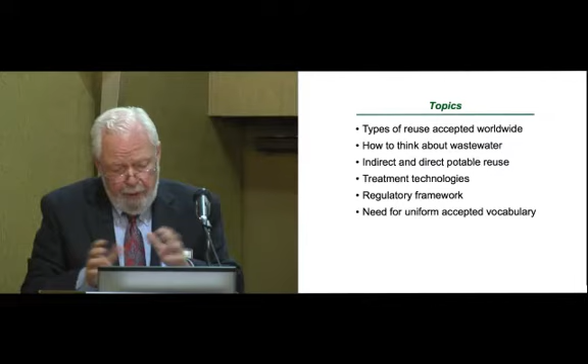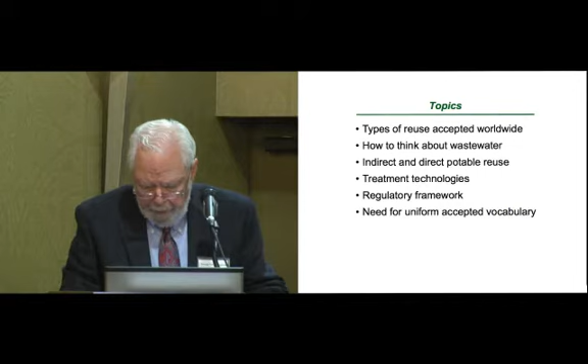So what I'd like to do today is talk a little about the types of reuse that are accepted worldwide. Then we need to take another look at how we think about wastewater, especially in light of the design of wastewater treatment plants. Indirect and direct potable reuse, some treatment technologies, a little bit on the regulatory framework, and the need for a uniform vocabulary.

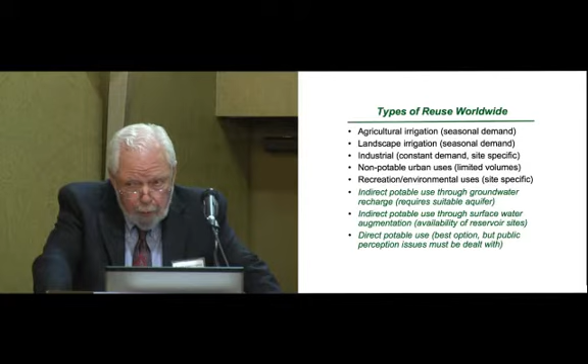So if we take a look at the types of uses worldwide, in order: agricultural, landscape, industrial, non-potable, recreational. Then we get indirect potable reuse through groundwater recharge. Then we also have indirect potable reuse through surface water augmentation. And then finally, really direct potable reuse. So let's talk a little about direct and indirect potable reuse. What are the driving forces for these two technologies?

Well, you heard it before, but certainly the value of water is going to increase dramatically. In the Central Valley in California, it's gone up by a factor of 3 in the last 5 years, and I anticipate it will go up another factor of 3. De facto indirect potable reuse is a reality. Infrastructure limitations. The technology is really not much of an issue, but population and global warming are other issues that will drive potable reuse, not only in this country, but throughout the world.

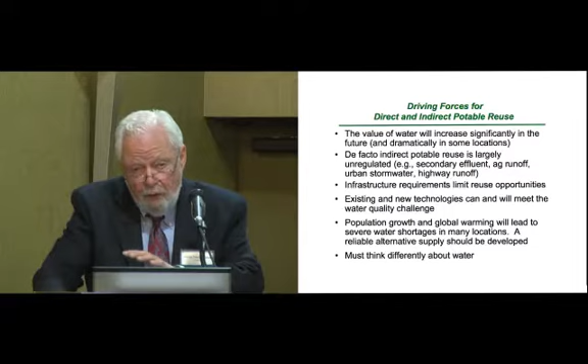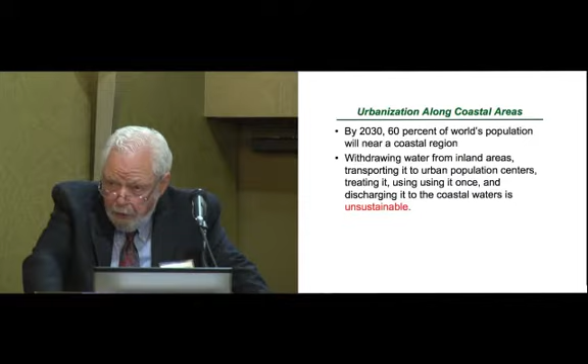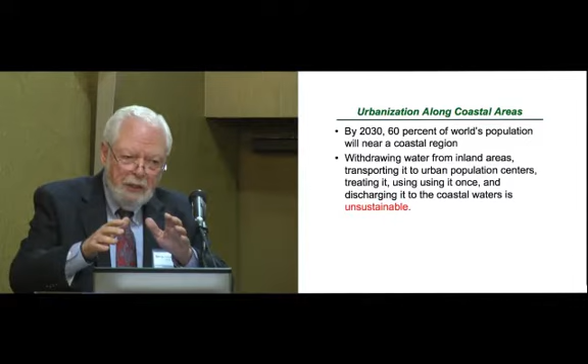The next issue is that by 2030, it's estimated that 60% of the world's population will live near a coastal region. Now here's the issue. As the population increases and we need food supply, it's hard to imagine taking water from inland areas, bringing it to the coast, using it once, and dumping it. It's unsustainable. As we get these population shifts and our population increases, what we're doing is really unsustainable.

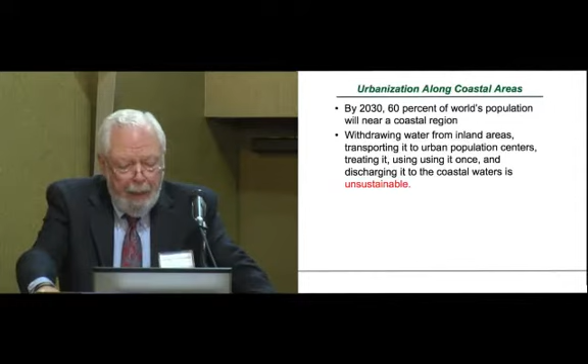Now, in the 21st century, we need to think about wastewater differently. Wastewater is a renewable, recoverable source of energy, nutrients, and potable water. That's how we have to think about it. When you start thinking about wastewater that way, you think about different types of designs. This is not a talk on treatment plant design, but there's so many things we can change in the way we do treatment. As we make these changes, we need to think about it in terms of this is a resource.

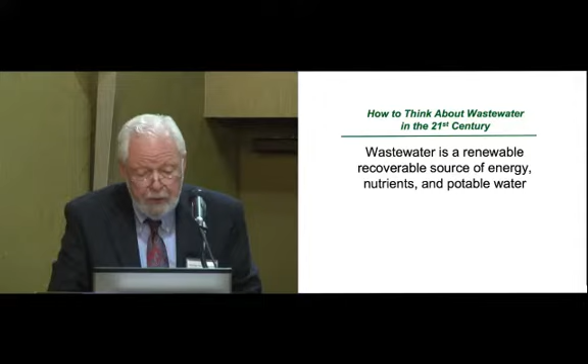We're going to get nutrients, we're going to get energy, and you heard that before in the previous talks, but more importantly, we're going to produce potable water. Now, if we talk about definition of indirect, on the bottom line we have advanced treatment, and the line going up is essentially the indirect part with surface water augmentation and groundwater recharge.

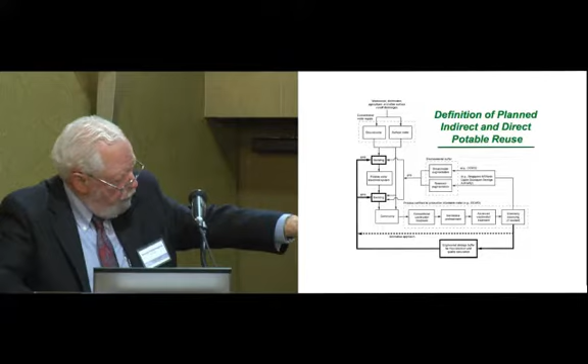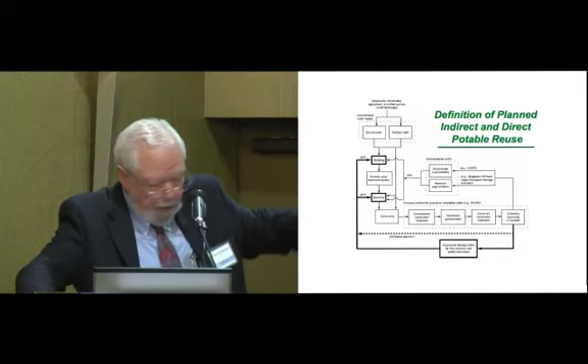When I talk about direct potable reuse, I'm talking about the bottom line in which we go from advanced treatment to an engineered storage buffer, and from there either into an intake of a water treatment plant or directly into the distribution system. In time, I think we'll be able to eliminate the engineered buffer and go directly from treatment into the system. What are some examples?

And what we're talking about here is the Orange County Water District essentially is the treatment with injection. San Diego, which just received its permit from the health department to add water to the San Vicente Reservoir, will add surface water. Now, as you think about adding water to, let's say, a surface water reservoir, just imagine what would happen if that reservoir just shrank down to nothing. And that may be the direction we're going.

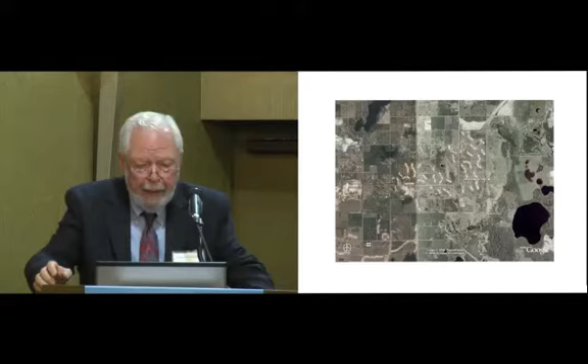Now, there's another issue here. Down below is the Santa Ana River. Now, here's what's interesting. In the Santa Ana River, you can recharge that water regardless of any of the contaminants that it might contain, surface runoff, partially treated secondary, without any regulation at all. Why? Because it's waters of the state of California, and the regulations don't apply. And so there are these disconnects as we move ahead. Barrier injection wells, that's been talked about, typical examples here.

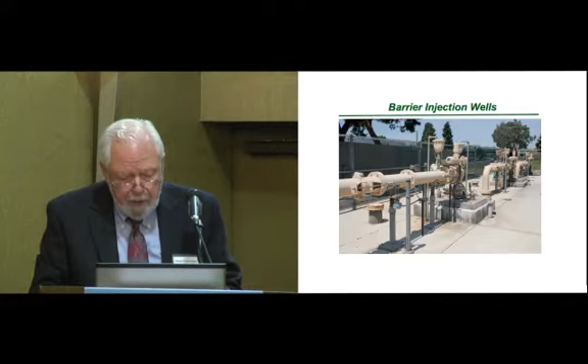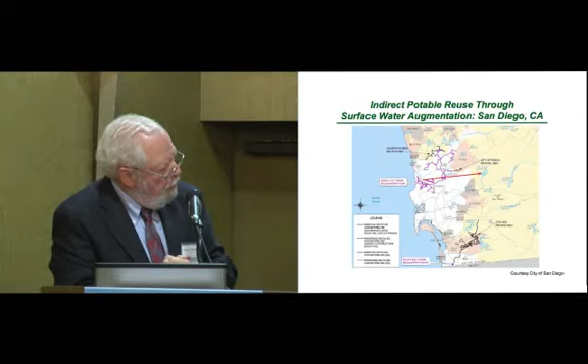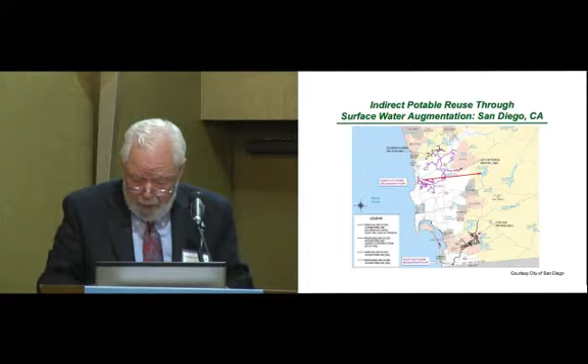Now, this is surface water augmentation. This is San Diego. You notice the spaghetti, purple spaghetti. In my judgment, in the long run, the use of purple pipe will not serve us well. And the reason that it doesn't serve us well is that the public believes somehow that we believe the quality of water is not acceptable. And with the treatment technologies that are moving ahead, we shouldn't have that. Also, that spaghetti only allows about 2 million gallons per day of recycling. If you're really going to do significant amounts of recycling, you've got to have either an environmental buffer or, as we talked, direct potable reuse.

20 parts per trillion of, let's say, an endocrine disruptor might be the treatment levels we could achieve. If we discharge that, 20 parts per trillion have been known to cause sex reversal in fish. Now, my department chair, who's a woman, says, a little less masculinization is okay.

On the other hand, if we were to drink this water with 20 parts per trillion, we would have to drink 496,000 8-ounce glasses of water to get what a woman gets in a single birth control pill. So, as you think about this, if you're really an environmentalist, it's far better to drink this water and save the environment. I don't notice much enthusiasm.

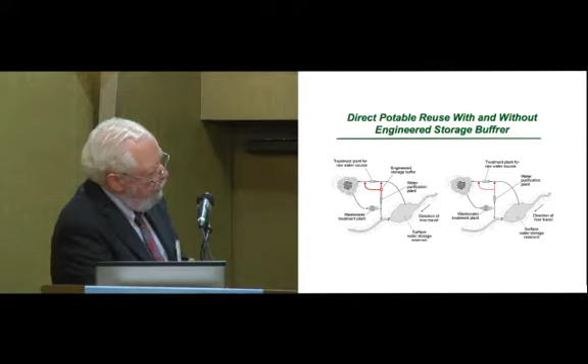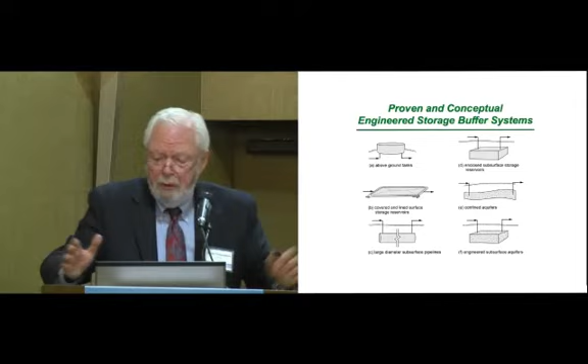So here we're talking about direct potable reuse with or without an environmental buffer. Now, when we look at environmental buffers, they could be of any type. Surface water storage, groundwater. Only your imagination limits you in terms of the design of the engineered storage buffer.

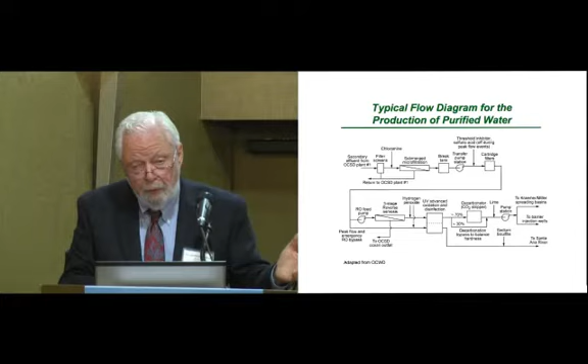When we talk about trends in treatment technology, the bar has been set pretty high by the Orange County Water District. Here's their diagram. I'm not going to go through this. You're all familiar with all the various processes. But microfiltration, cartridge filters, reverse osmosis, advanced oxidation. It's interesting. People say, well, why cartridge filters if you have submerged microfiltration? And the reason for that, of course, is that the chemicals used to prevent scale are not highly purified. And so to remove the impurities from those chemicals, you need cartridge filtration.

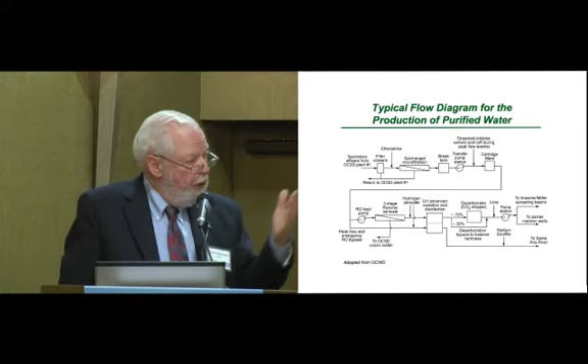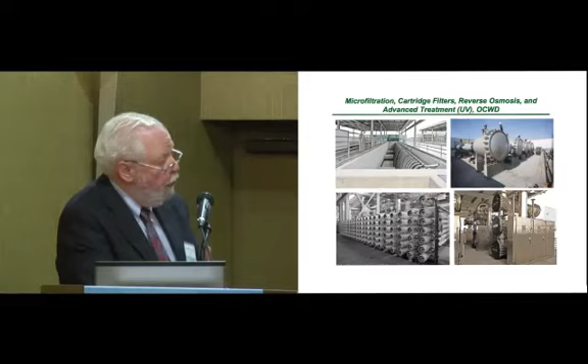Here are the units. And one of the things that truly is exciting at the work that they're doing, you notice this upper module? What they have done is for each bank, they have an additional module in which they're testing new membranes on a continuing basis. And what that allows them to do is to really benchmark the performance of new technologies versus what's going on currently with their existing process, and you're doing it at full scale.

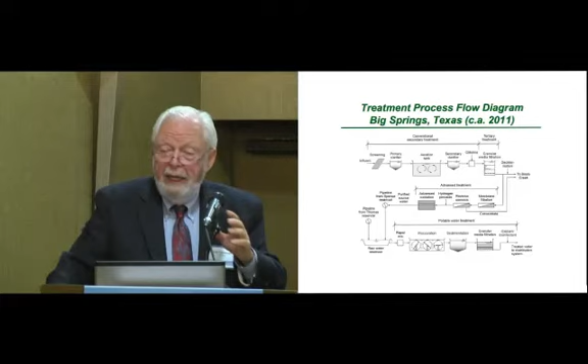Now, here is the diagram for Big Springs, Texas, and essentially they've adopted the Orange County Water District scheme. They're going to take their water, they're going to blend it, and then it's going to go through a water treatment plant, and that will be direct potable reuse. Now, Big Springs, Texas is a bit of a problem because their water supply has a TDS of 3,000. If you drink that water and you have fillings, you can tune Wichita in your mouth.

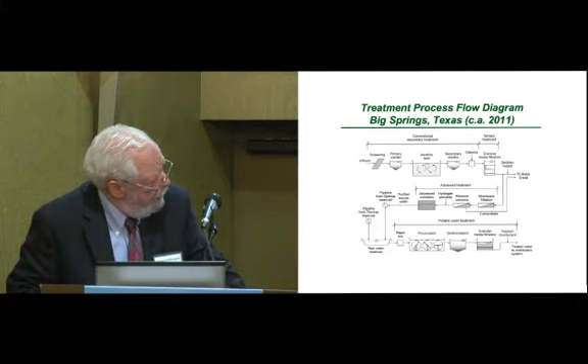I just need to tell you one story about this. When this system first went on, this was 30 years ago, they announced to the public when it was going to be turned on. That Monday, people called up and they said, you know, my right arm fell off. I've lost my tooth. Everything imaginable. Fact of the matter is they didn't turn it on until 3 months later. So public perception really is a major issue here.

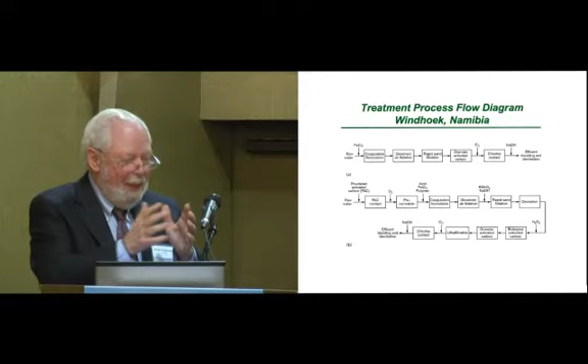Now, as we start to think about this, inland areas where we don't have access to an ocean for brine disposal, there is certainly a huge interest in the many different ways we can use ozone effectively for processing the trace organics in wastewater.

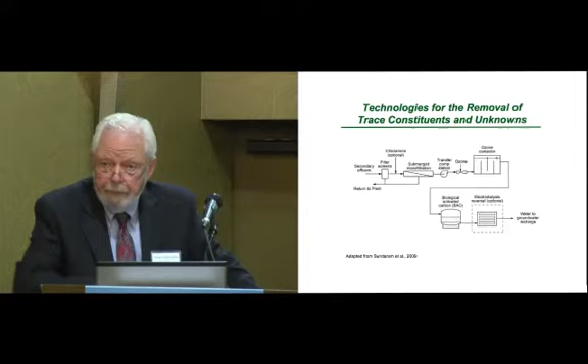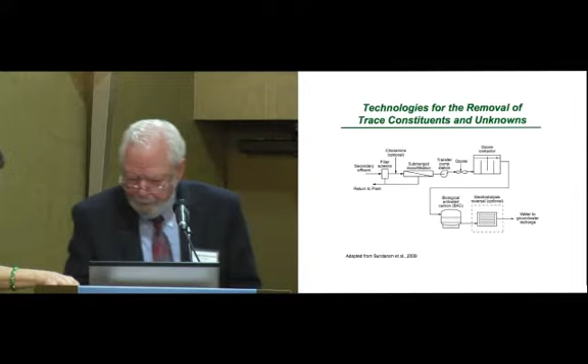What's happening here? Jenny, do you have any? Try that one. No? You're right the first time. Uh-oh. Page down. Nothing is happening. It's frozen. Nothing is happening. This is moving here. We have all the experts here. No, just us. Oh. Maybe try escape. Start over. Yeah, press the escape. Even escape doesn't work. Oh my. You want to reload it? No. Let me try this one. Okay. Yeah. It's frozen. Oh, got it. What did he do?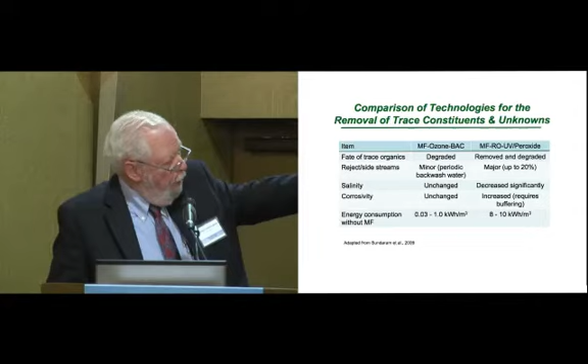Whatever, it was wonderful. The long and the short of this particular table is look at the bottom line. If you look at the energy consumption for the ozone-based systems, you're talking about 0.03 to 1 kilowatt hour per cubic meter. With RO, UV, you're talking about 8 to 10. So it's a huge difference.

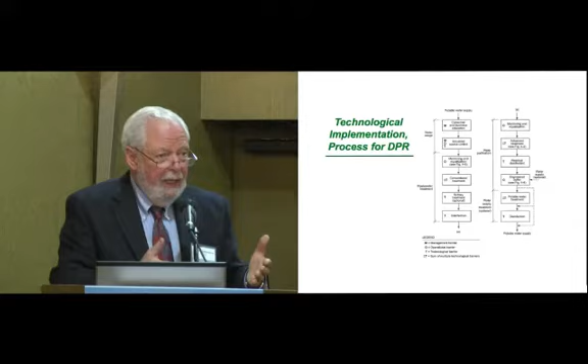Now, when we start thinking about designing these new treatment plants, there is a whole new technological implementation scheme that we have to look at. Just as an example, it was mentioned in the previous talk that why do we return flows from, let's say, digester supernatant or dewatering activities to the head end of a treatment plant during the daytime hours? Why? Because the operators are there. And yet it screws up treatment plant performance something fierce. So as a minimum, if you just put in flow equalization, you would enhance the performance of your treatment facility. So we really need to rethink the way we design these treatment plants from the get-go, and especially as we think about producing potable water.

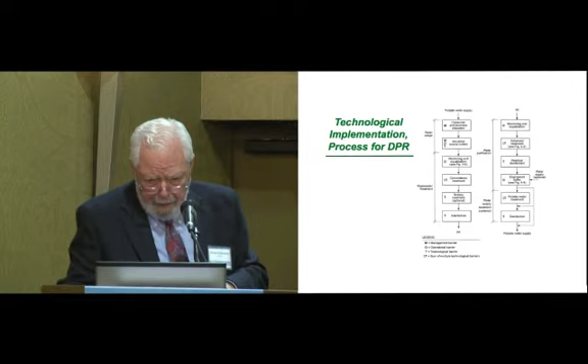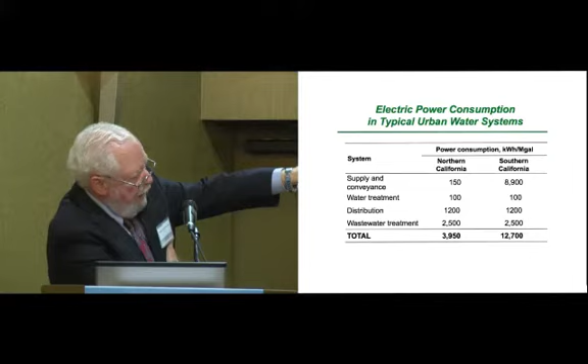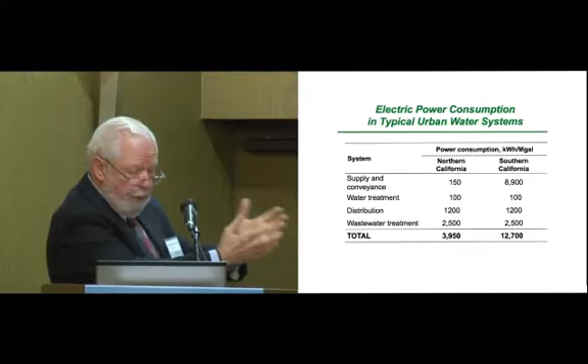Let's take a look at what happens here. If we look at treatment, distribution, and wastewater treatment, they're the same. But look at supply and conveyance. Northern California, 150 kilowatt hours per million gallons versus 8,900. That gives you some idea of the magnitude of power that's now consumed by transporting water over the Tehachapis.

So, what's the answer? Well, the answer is that we should reuse water in Southern California. And what would that do? Well, it would add additional water for agricultural use during dry periods or drought periods. It would add additional water for environmental benefits in the Bay Delta system. How might we do it? Well, we already have distributed wastewater treatment facilities. We would just simply put, for the sake of discussion, an Orange County Water District type treatment plant at each of those locations. Well, what does that mean?

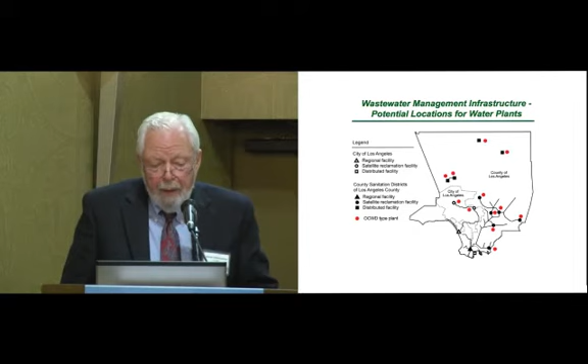Right now, we're talking about $30 billion to build peripheral tunnels around the Bay Delta. It works out that you can put in 1 billion gallons worth of treatment for $5 billion. And so you now have to think about it a little bit. It's not as simple as just, let's put in tunnels and do more of the same. There are alternatives here that are significantly less expensive and make a lot more sense.

And we have more water for agriculture because our population is going to increase. We have environmental benefits. We have reliable supplies. So it works out that the $5 billion is a high estimate. I think it could be done for less. But that's the scale that we're talking about.

Now, on regulatory requirements, the only thing I'd like to talk about is that in the post-1980s, science really has leapt ahead. I mean, it's just outstripped us. And unfortunately, we still have semi-empirical and empirical legacy regulations. Now, for example, in the Orange County Water District, when the state issued its standards, it said you need 6 months in the groundwater. So I said, well, where does this 6 months come from? And the answer is, well, we think you get 1 log of removal for each month in the groundwater.